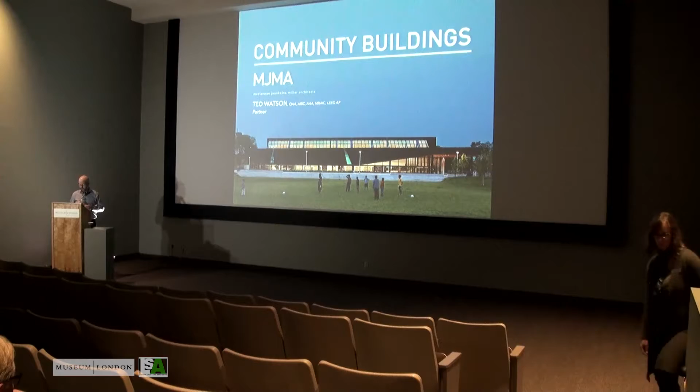So in thinking about how to approach that, I asked the question, why? Why do we do what we do? Why do our clients want to do what they're doing? And so in a way, what are the values at the heart of what we do? Our office really believes in community, and we know our clients do.

And that's what we're all really trying to achieve. Community is this greater thing that strengthens people and groups and reaches out and makes connections within the community and also to other communities. And I think we always try and retain sight, when we get caught up in the design and the architecture and all of the technical bits, that we're really creating armatures for people to use and to strengthen their relationships with others and benefit from it and create healthy, vibrant, socially and economically sustainable communities.

And now we believe that, okay, within that, good design can really transform communities. Now, of course, if a client has $30 million and they're going to make a recreation facility, that is going to improve the quality of that community, absolutely. As architects, and given our toolbox, what can we do to actually make that the best space that we can, and to exceed expectations on what those buildings, those facilities can do for the community?

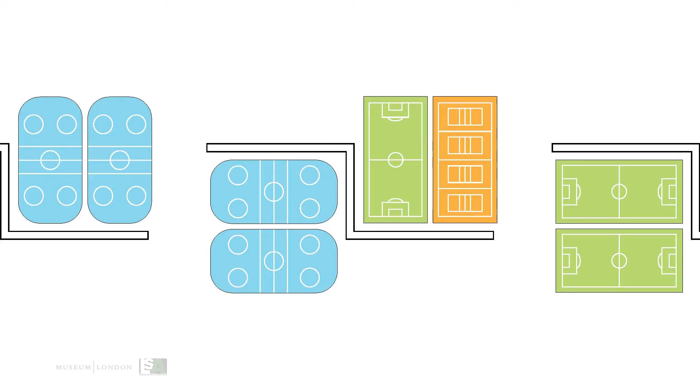The other notable element was the programmatic challenge—talking about Brampton, you need to talk about the demographics. In the last 20 years it's entirely changed: a much younger population, lots of new families, a lot of recent immigration into the community, a lot of South Asian population. What this building started out as was a quad-pad arena. By the time it got to an RFP, it became more of a multi-purpose recreation facility, but still had that Canadian ice in there.

By the time we finished the project, it was a 4-pad soccer center of excellence. So it actually evolved, but through the process there was an understanding that it could be infinitely flexible and adaptable through its life. That's, I think, one of the key issues in terms of the programming on this site.

In terms of the site plan, we needed to understand how we could take a huge, bulky building—a 4-pad arena—and break it down to make connections to a suburban site that has an urban feel and fosters civic space. This is our site, showing the building placement. It was very simple: if you look at a quad pad, there's only so many arrangements of those boxes, so we basically turned one as twin pads and shifted it to create these two spaces.

That created a corner site condition—an urban park on the corner that became a landmark urban space. Then on the inside of the site, we created a forecourt for arrival that fed into the other four outdoor playing fields.

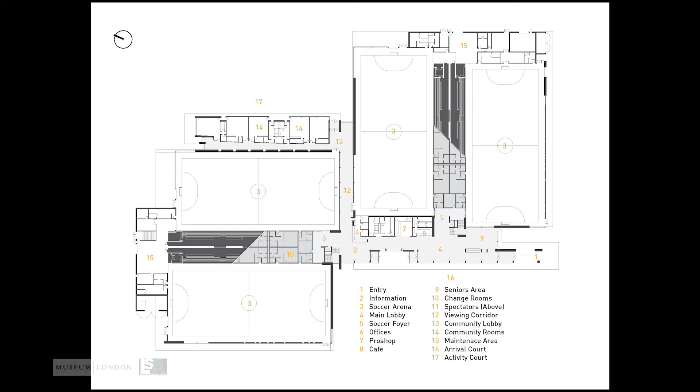Looking at the plan, here you see your typical twin pad arenas with change rooms and bleachers at the upper levels, and the service space at the back.

In this diagram of shifted and twisted boxes, we have the two soccer fields, but on each side we have an arrival court and a community court created by that shifting, along with a community space and a lobby space that relate to both of those.

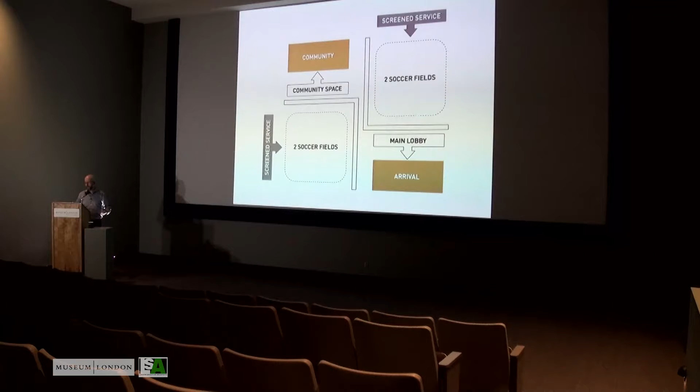On the perimeter of the site we have these screened service areas, so we're putting the service areas on the perimeter at the roadways. How do we deal with that was the question.

In terms of movement through the building, it actually concentrated access to the four pads very closely in the lobby space, but then allowed that transverse corridor to connect to the civic space on the corner of the site.

Looking at the design of the building, we kept the boxes very simple, but the community element and the lobby element became these lower roof structures with high volumes that represented entry, connected through light by the transverse corridor between the two outdoor spaces.

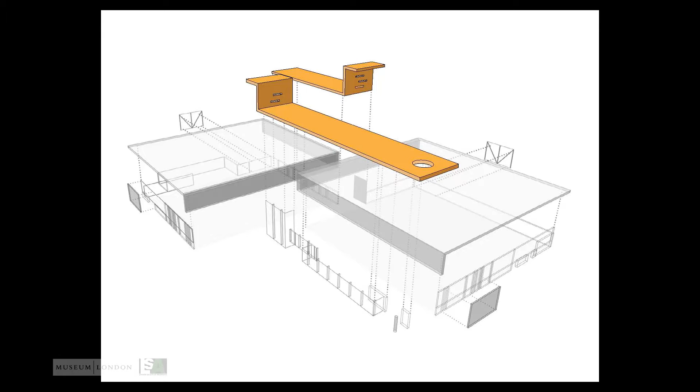Going back to this diagram, because of the plan it turned out there were six facades, and we treated them as pairs, so there were three pairs that were actually identical: the parking lot facades, the street facades, and the forecourt facades. We'll look at each of those.

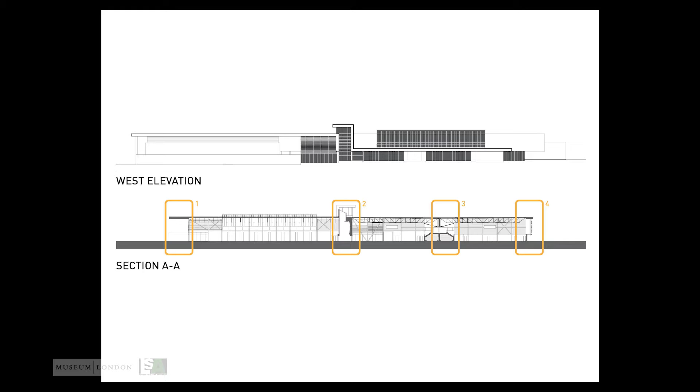These are the forecourt facades. And then through the plan of the site, how do we make all of this work on the budget we had? The entire project, including the site, was completed at $180 a square foot, so it was tight and we had to make it work.

So we treated the building really as a warehouse structure. It was all repetitive, the boxes were dead simple, and it was only the edges that we really elaborated. It's really this cross section - if we close up on it, we can see where those points are. We focused the design efforts on the places we felt would have the most impact on the exterior and through the center.

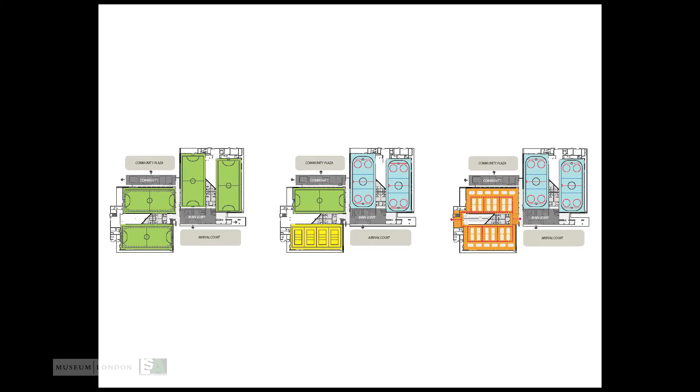In the end, the planning resulted in a facility that was flexible and could be infinitely convertible into different programs. In fact, they put in a basketball court, which wasn't even planned for, but the building's interior finishing was designed for indoor soccer, the mechanical functionality was designed for hockey, and the height was designed for volleyball. So it was very flexible and convertible in the future, depending on how the demographics would shift in the neighborhood.

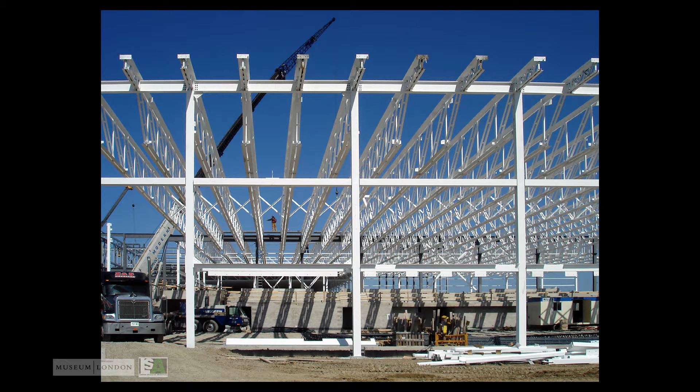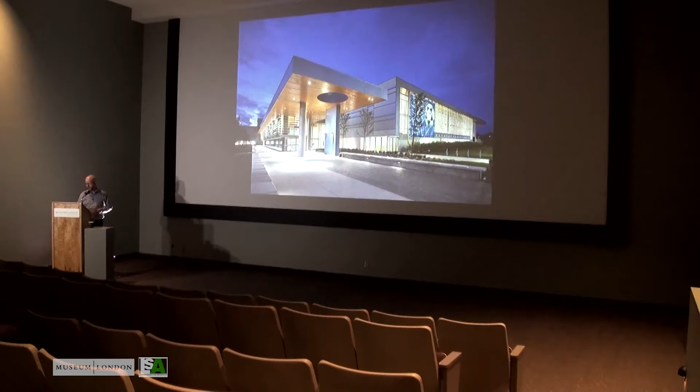Here you see, as you enter into the lobby space at the parking lot end, the use of wood that comes indoors, and you can see the clarity of circulation. There was a very studious application of AODA accessibility requirements to the floor, and the city was very interested in making that happen.

A lot of the floor patterns we developed were based off requirements for accessibility. You can see this at the stairs and elsewhere, along with the organization of the mechanical and servicing areas within the ceiling space and the woodwork.

Here's the transverse corridor. In terms of organizing with natural daylight, this is almost the heart of the building, because it brings that light down and connects the two main spaces of the site. There's all this transparency, sharing of different activities within the space, and you're actually walking through the center.

It's kind of like when you're in those aquariums that have the sharks on either side. You're going through all of these soccer games that are happening, so you can't help but feel part of the activities. That's the view down the community corridor, lower scale, but again using light to guide you through that space, and the judicious use of wood in those community areas.

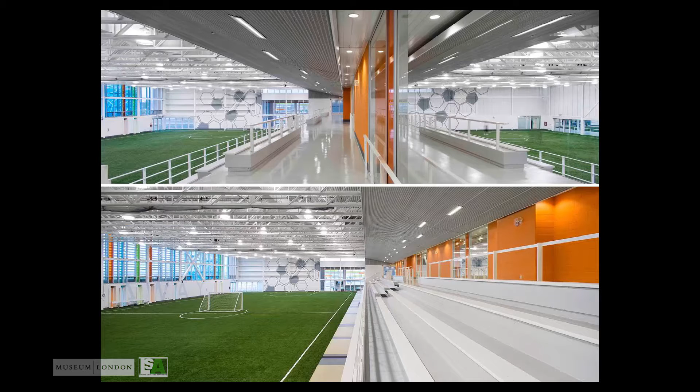This is a view from the upper level that shows the transparency between the two different facilities. And the use of graphics—this is what we call in the office liquid pigment, our finish here. It's just painted graphics on the pre-engineered wall surface. Even the decal for the glazing is a sort of exploded soccer ball decal.

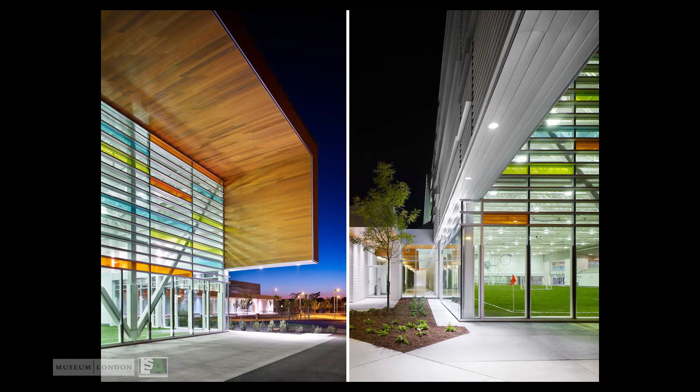Some views out to the community space. And here we're on the exterior. These are the facades to the street, and they're in two parts—one is a kind of hooded bay window to the street on the north and west.

You can see on the outside the views that allow for this transparency to come into the facility. So as you're driving by on Sandalwood or Dixie, you can see at night what's happening in the facility, and it animates the street and creates a vibrancy.

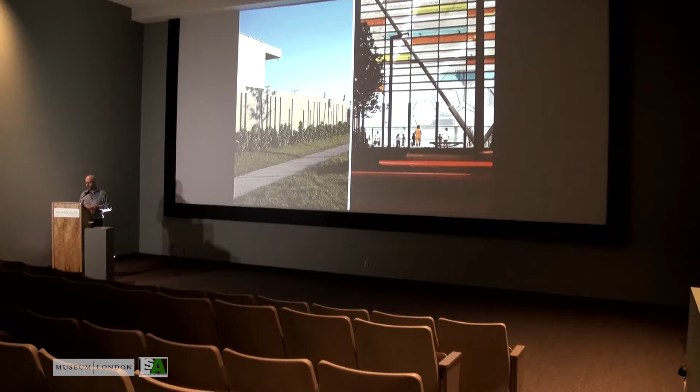Concrete garden walls were used, in this case with slots through them, to shield the service areas—the garbage, the transformer areas. That's what that looks like from the street, from the naturalized drainage channel across the way, with a view to the right of the civic court.

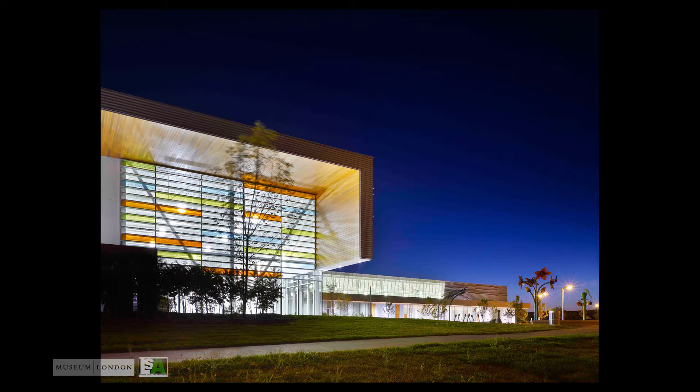The parking lot facades were actually the ones you see from a distance, and they were the ones you primarily arrived to the site by. So we wanted them to read almost as billboards of what was happening on the site at a large scale, because they're the first thing you see driving in, and also within the parking lot.

But we also needed, because they face north and west, to control the daylight within that space. So we used this louver system and incorporated a signage system to work with that. The city was also very interested in branding the facility with Brampton blue, so we incorporated some glazing panels that also protected the light going into that space. That's another view from the south parking lot.

So, Commonwealth Community Recreation Center and the Edmonton Eskimo Fieldhouse. This is a project we started in 2008, and it had to be operational in 2010 for the Grey Cup. So we had a good schedule, which was good—it's always a good motivator.

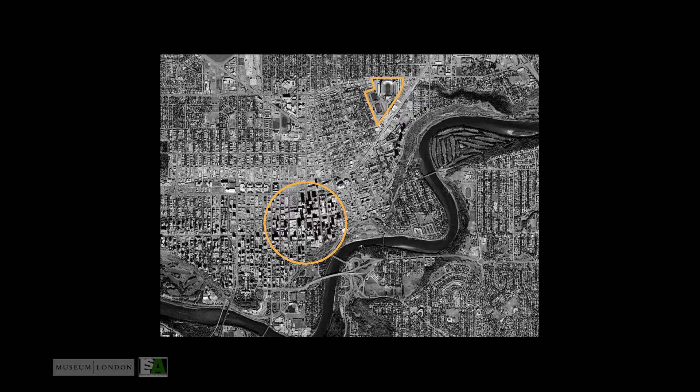The city, somewhat like Brampton, has a lot of revenue coming in, so they're providing a series of five recreation complexes. Unlike here, these complexes range between $100 and $150 million—that's Alberta dollars, so it's somewhat inflated, but the scale of these facilities is much larger than what we're familiar with here. Our project was the second one, and it was closest to the city.

You see the downtown, and it was one stop off the subway tracks—a great location, but a somewhat marginalized site that is home to the 1978 Commonwealth Outdoor Stadium, which is really a heroic and magnificent structure. But it had fallen into disrepair, much like event spaces that aren't in use throughout the year.

It had become abandoned, with vagrancy and drug use—so it was an unsafe place. The community site also has this pizza-slice shape to it, really the resolution of three grids coming together, which really drove the planning as well.

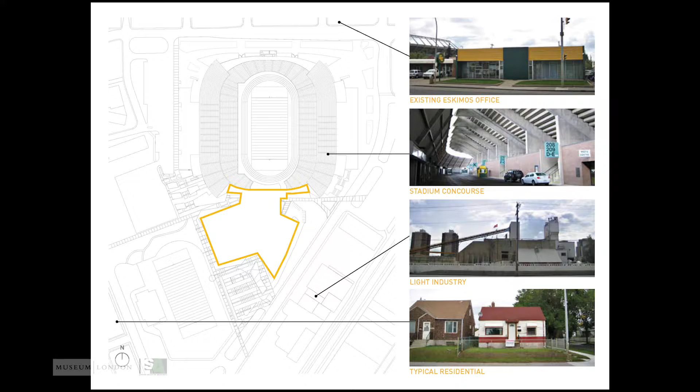In terms of the fabric around the building, we had the Eskimos office nearby. They wanted to be part of this structure. They had money for a field house, but they also wanted to be part of the stadium. We see the stadium concourse, which is this great precast stadium.

Then light industry happening along the LRT line, and these are typical residences, little wartime houses. So it was a distressed neighborhood, identified as such, and it needed a shot in the arm. So one of the site challenges for us is how do you repair this neighborhood?

How do you make these connections and animate this space and make strong connections into the facility? In terms of the programming, the challenge we had was 3 groups. There was stadium operations. During construction, U2 played there, and there was, I think, 100 semi-trucks that went in and out of that space.

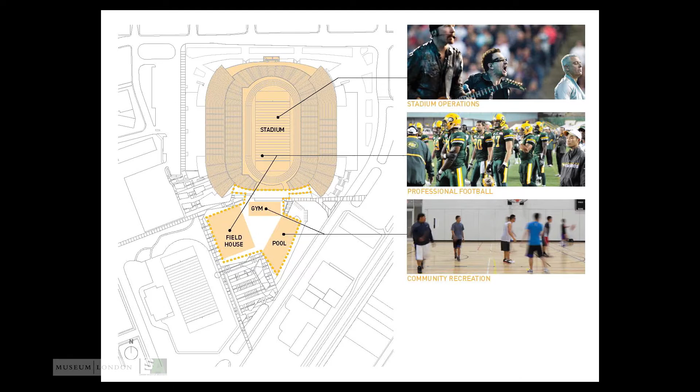So, you know, that's typical a few times a year. The Eskimos are playing there as well, large events, and they're going to be part of this facility. Then you have the community, who do swim lessons and kids soccer and fitness and whatnot. So how do you bring these 3 groups together? And more importantly, how do you make the whole greater than the sum of the parts, where there's synergies so that the programming overlaps, is flexible, and people are getting more than they actually bargained for.

So the project started with this existing rec center, which you can see the gym there, but then on the front side there was a series of racquetball courts all facing into the stadium with concrete walls. So clearly it wasn't the greatest use of that space. It was 3 levels.

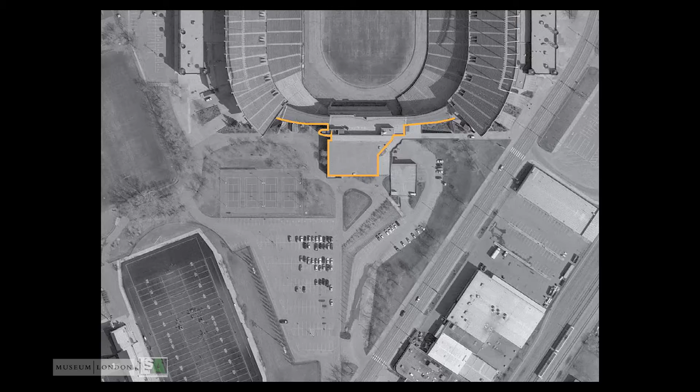We adapted. The other thing I should say is there was this marathon ramp, for the Commonwealth Games, the marathon came in and out, but really it's the service ramp, and it's critical to the functioning of the stadium. However, it created this trough that further isolated this site from the urban streetscape.

So in placing the large field house, pool, and other major program elements on the site, we did that so we could organize a space in the center. And the city, I think, was very forward thinking in that every site they developed had to have a social heart on the site, both indoors and outdoors. So that's their terminology, social heart, and I think it's a very good one.

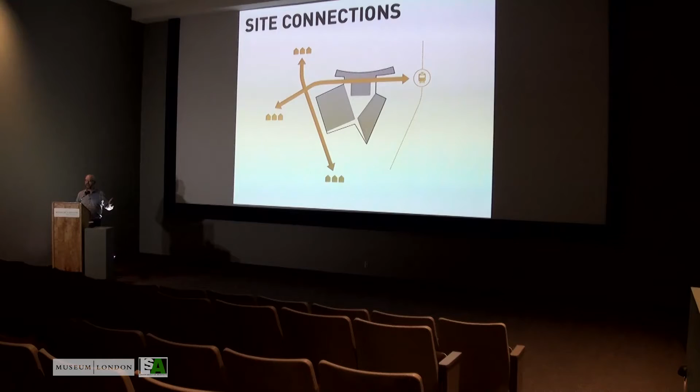So the response to the site was basically we followed the alignment to reconcile these grids, and then we brought the planning through the building to connect the neighborhoods and to connect to the LRT stop. And we created 3 separate entrances to feed into this social heart, so that the scale of this building wasn't creating more obstruction in terms of the use of the site.

We also created an event plaza out front that was at the scale of the site. So it's parking, but also an event space. Then we made the rest of the site basically a garden buffer, while appreciating that there's a lot of people on this site during game days and events.

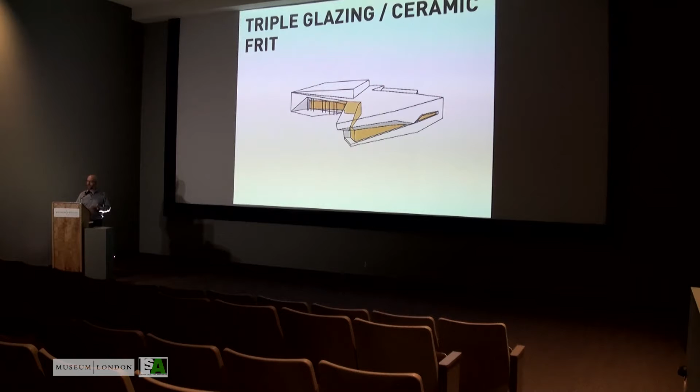In terms of sustainability, we had a daylighting concept of skylights and clerestory lights throughout the facility, with dimmable zone lighting control to adapt to the natural light coming in. Triple glazing in Edmonton made a lot of sense, particularly around the aquatic facility, with ceramic frit to modulate the sun and glare, and then a southern canopy at the front of the building.

We also had natural ventilation through the field house, so there was no air conditioning in that space, and it's naturally ventilated. Finally, a solar wall preheats the air that comes in, so even if it's minus 30, you're getting a 20-degree increase in the heat coming into the space.

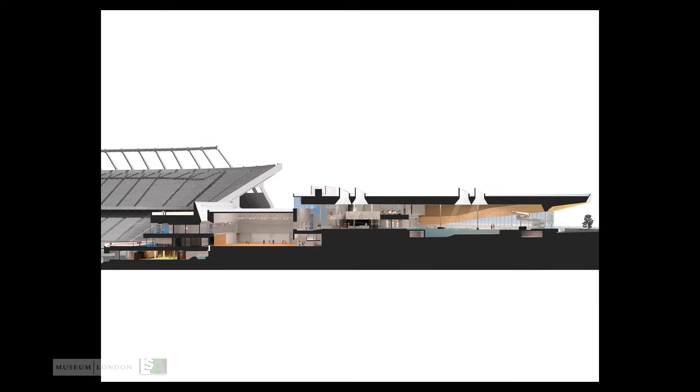Planning and programming: the section shows the stadium field is 2 to 3 stories below street level. We were working with the existing structure and gym, and needed to interconnect all of them, the Eskimos primarily here, through 4 levels. So we did a lot of both computer models and physical models to look at how to tie into the stadium, how to make this ramp work, and the forecourt space.

From an architectural perspective, the challenge was how to take very different size pieces and tie them together as a legible singular object that functions at the scale of this site. The stadium is a heroic and iconic piece of architecture, so we felt we needed to bring everything together to create a large and dynamic form to compose with it.

We looked at how to arrange that social heart space as a double height space with fitness and studios. Then from the stadium side, we looked at what the expression of the building should be on that side. I'm going to quickly go through each of the levels, starting at the stadium level.

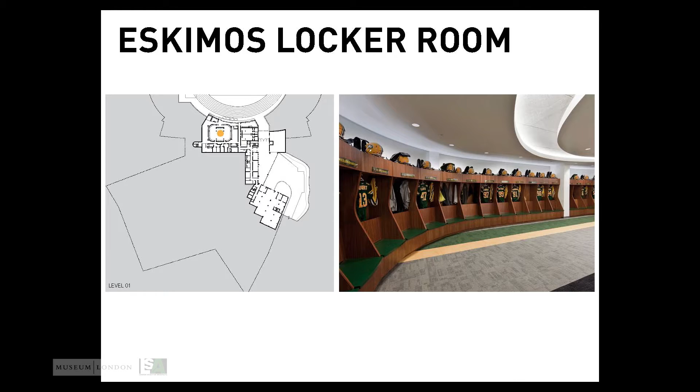The Eskimo locker room—we pushed out part of that space right to the track to create the locker room space. This is the service ramp and access space that we were able to make larger and more functional for them. The Eskimo box seating space sits on top of the locker room on the second level.

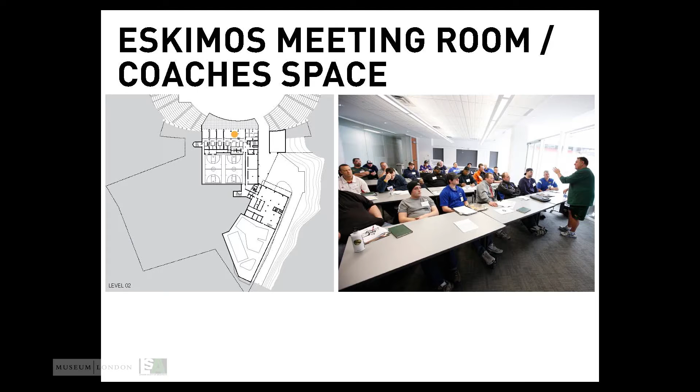On the inside is the coaching and team rooms where they would meet, but these rooms also functioned as community spaces, and for larger events they were the hosting spaces for concerts and such. So this level could really function as a multi-purpose space for all the users, as did the gym.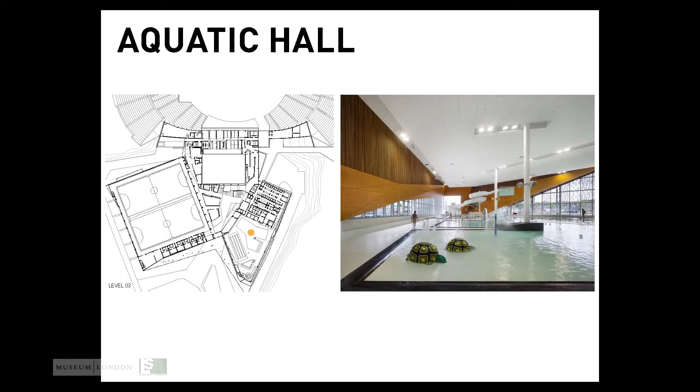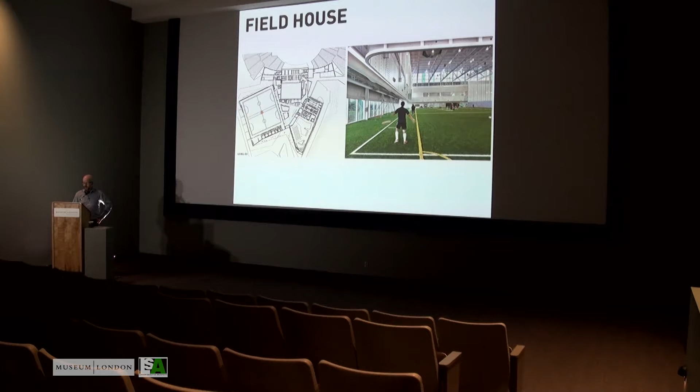The aquatic hall, where we start to see that wood coming into the space. And this is the change room, the universal change room with diffuse natural light at the back of level 3, the field house, the upper level running track at the 4th floor, and fitness and weight room as well.

So we had Eskimos working out in there along with everyone else, and it was very interesting—aerobic rooms as well. This is a view from the front of the building, and you can see the stadium to the right in the background.

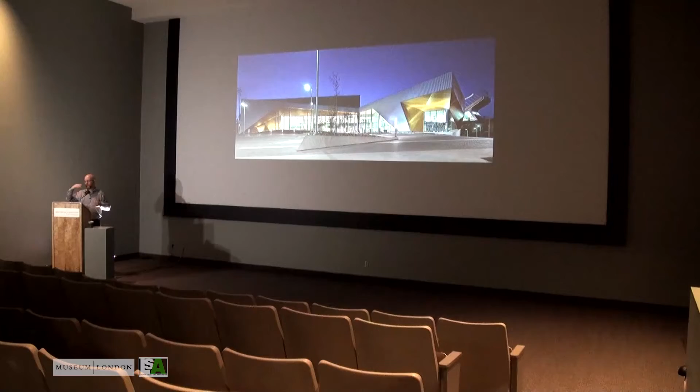The gold triangular shape is actually the top of the field house, which is a much larger form coming up, and it's represented as the solar wall with the Prodema wood cladding on the inside, creating this warm canopy.

It was important to create this canopy that was at the scale of this event space, which was also a parking lot for arrival.

You can see the fitness area at the upper level all looking out, and they have a great view of downtown from that level. To the right, the pool.

Then within the lobby space, we see centralized natural light. We started with 23 skylights and we ended up with 4. A lot of them got value engineered out, but in the end I think it was a good exercise because it focused the light where we wanted it.

Through the skylights, to the back, to the stadium. This is the information desk—clients always ask us for a big sign for the information, so we thought it would be fun to actually put it in the ceiling like this. It's the biggest information sign we know of.

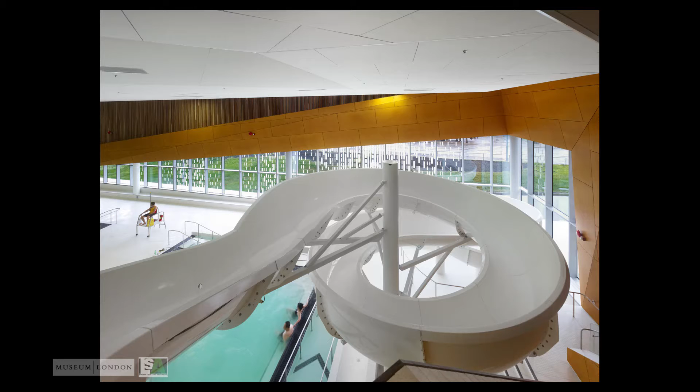There you can see the use of ceramic frit on both sides of the pool and elsewhere, partially for solar gain, but also for privacy, to create something of a veil between the people arriving at the entrance of the building. Then the stair is within the skin, so it's actually controlling the space up and down.

You can see the use of the fitness area, and down to the gym and out to the field house or the stadium beyond. That's that stair.

We used a material called Fundermax that was milled, and we actually came to that because it was cheaper than any other solution we could come up with. We started with a glass and perforated metal solution and ended up with this.

Aerobic studio and views into the field house with precast casual seating for spectators. Here you can see in the field house the natural ventilation fans at the top, and on the other side are triple hung windows.

The entire west side of the building opens up to the outdoor practice field and also to the community promenade that connects the community. So on events and game days, those doors are open and people can flow inside and out.

This was Grey Cup. You can see the plywood on one side. We'd only built the field house, but they had the big party for the Grey Cup, so you can see a lot of Saskatchewan jerseys down there.

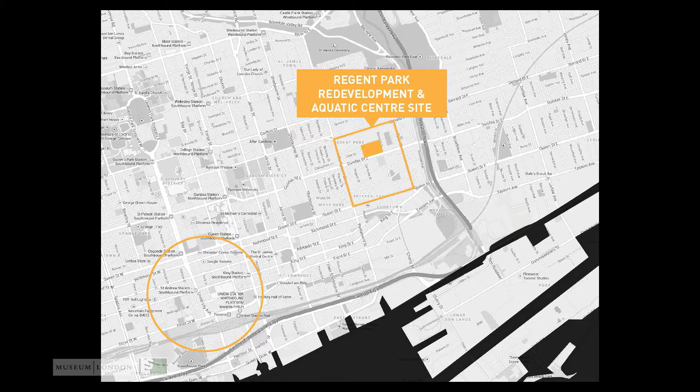That's the downtown core of Toronto, and that's the Regent Park development over the three phases. Our site is the little rectangle here.

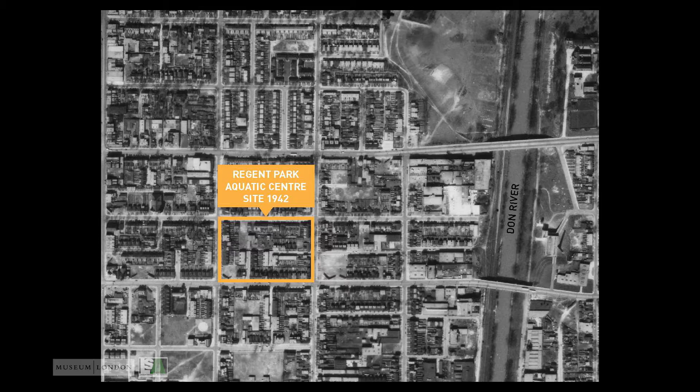This is an aerial view of Regent Park, 1942. There's a long history to Regent Park, but it was Victorian, then it became a slum, so it was very small scale. In fact, if you're in Cabbagetown, it was a lot like that. But it had become a real slum, and there was a determination to fix it.

By 1957, using the Garden City model, a social housing scheme came into effect, and that's our current site today. In fact, the scheme advanced further and took up the entire area, and what resulted was a disconnection of the actual street grid.

They took out some of the streets so that there were walking streets and garden spaces, but I think we're all familiar with what that's resulted in. So connection was really important in terms of the revitalization. Down below, there were some very nice Peter Dickinson apartments built in the 60s as well, but they're also under the wrecking ball.

You see to the right, kids protesting to try and get the outdoor swimming pool. It says, 'Where's our pool money?' So there was an outdoor pool that was built, and it was well loved in the community. In fact, when we were designing the new aquatic center, after a lot of consultation, what we heard a lot was that people wanted it to feel like an outdoor pool—they wanted to still have that quality.

This is Regent Park today. Over the last 20 years, it's moved from European immigrants to more recent immigrants, and it's really become a transitional neighborhood. There's a lot of distress—50% of residents are under the poverty line, so there's a lot of crime, which has led to this revitalization. That, and the fact that it's a great location for new housing, means it's going to be a combination of mixed use and affordable housing.

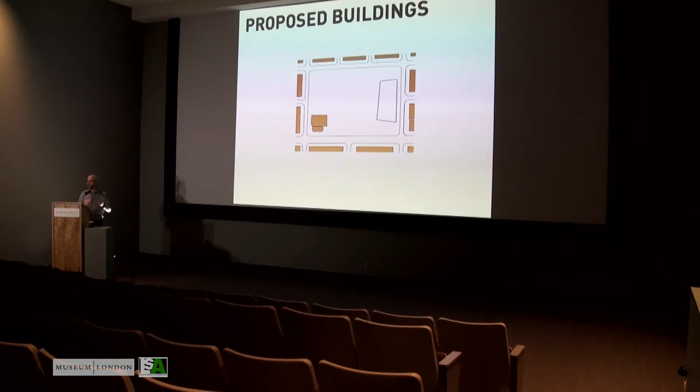And in terms of the programming question, with all these new immigrants in the neighborhood, a diverse mix of race and culture, how do you create a swimming pool which is culturally difficult? Questions of nudity, exposed skin, mixing of gender is a big issue, along with notions of crime within this area.

How do we address those, but also how do we make it exceed expectations as a facility? So looking at the site, the figure ground shows the proposed buildings and existing buildings. It was a 6-acre site, and we were given the west side of the site. Connections through the site were important.

Through the planning of the park, which we did preliminary work on, we came up with the idea that there's a number of amenities, playgrounds and markets around the park, and the center would have a central active space, which would really be the heart and open space of the park. We felt it was important that the aquatic center really address that central park space.

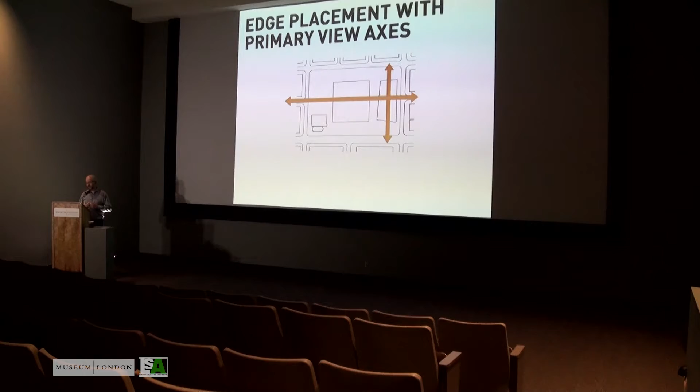Rather than the city pushing us towards a corner building that registered the corner, we felt it was more important that this was a pavilion building that registered the street, the urban street edge. So we took the approach that we wanted the most transparent and open aquatic area that really opened to the park and felt like an extension of it, like an outdoor pool.

So we placed all of the dark programming on the street side, on the Sackville side, and in the interest of creating a dynamic street presence, we created the most transparent and nice dry corridor that we could come up with, and then we perforated this bar as much as we could to allow for those

penetrating views and interconnections. So this is the first facility in Canada that went fully to a universal change facility. There's no male or female washrooms or change rooms in the facility at all. What it is, is a central bank of toilets and showers with cubicles for changing and lockers.

And it's actually very virtual—it's glass on all sides. And in the end, this is the kind of circulation, movement, and sight lines that you get through the building.

So looking at the massing, the earlier model shows this bar being expressed, but by the end it became more of a singular gesture that kind of tied together and almost became a subtractive volume that was carved versus additive and built up.

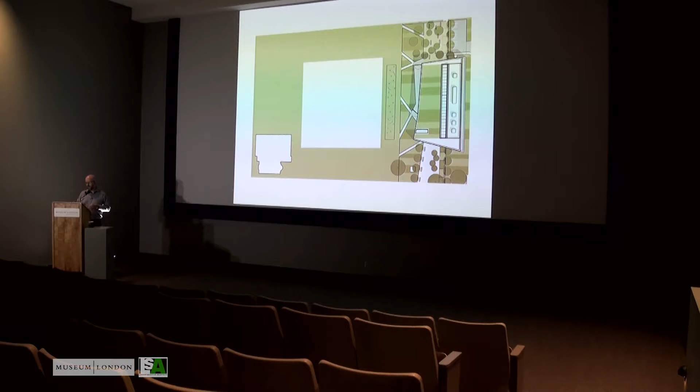Just a diagram that shows all of the different elements throughout the building, and the central skylight. Well, this site plan shows how the roofscape actually became the fifth elevation of the building, and the green roof on top really needed to address what people were seeing from these high rises and also tie into the landscape design at the base.

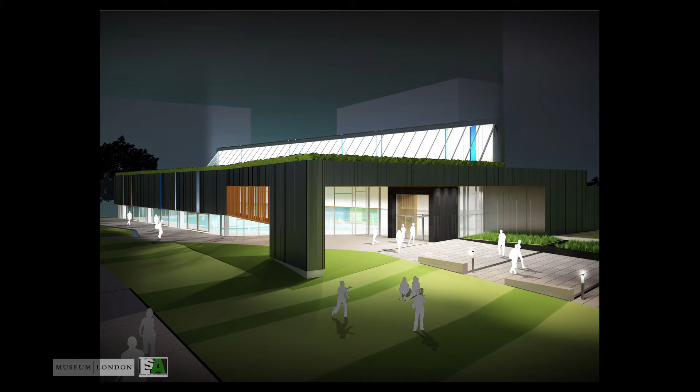And this is an early model that shows the green roof and how we attempted to make that happen. And a longitudinal section which shows how the west face actually lowers down to block out the harsh western light coming in.

And a cross section through the building that shows this lower section on the west, and then a lot of glass and transparency to the north, very good light, and then we're dropping light in from the top. We call this the dorsal fin of the building that really ran the length of the building and allowed for that connection to come through.

And then the change room is a lower space that allows for the mechanical systems to be screened up above it, and then there's that dry corridor along the eastern face of the building.

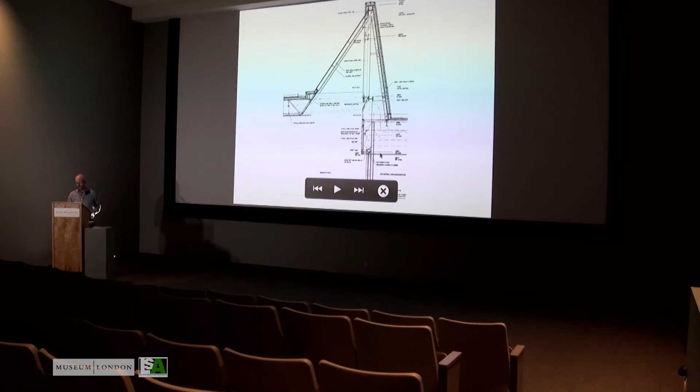And here's a section that shows that dorsal fin skylight that runs the length of the building and how we paired the mechanical with the structure to bring the mechanical system through that space.

And here's a view from the high rise across the street and from the roof that shows the green roof actually interconnects. We haven't got the final photography on this yet, but it connects with the blue lines of light in the glazing so that it really does become a studied elevation from above.

And this is the view from the south that shows the access into the building—very transparent, very welcoming, very warm. The use of wood really glows, as is often the case in many of our projects when we can afford to incorporate it.

Inside, it's a very tight lobby space, but because it's part of that higher vaulted skylight, it doesn't feel too constricted. There's slatted wood that's acoustic on the inside of the aquatic facility.

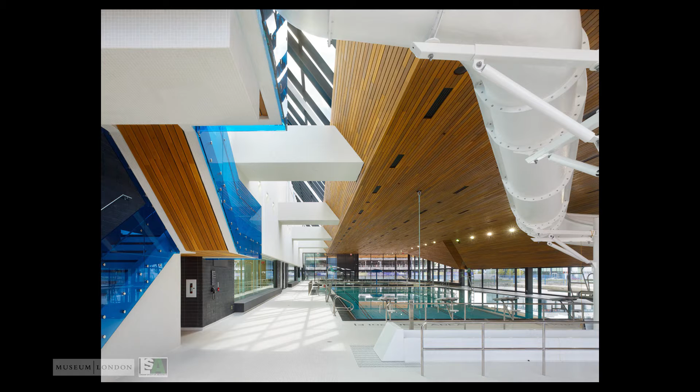We see here the slide, the Tarzan rope, and the slide diving board. There's a lot of fun activities for youth, which is really important in aquatic facilities—not just kids, not just seniors. You've got to try and animate those spaces for the middle ages too.

Here we see a view down the length out to Dundas Street, with the streetcar going by very often. Then there's the quality of light at midday—it changes as it moves through that skylight, which faces directly south. You can see through the change rooms from pool to street, from park to street. This building is perforated.

Moving outdoors, there's a sunbathing terrace with three bays of sliding glass that open up to the exterior.

Moving around the building to the east side—when we went to the design review committee, they were very concerned that this elevation was too monolithic. So we focused on making it bold and monolithic, but as finely detailed as we could.

In this change room, to the left you can see into the universal change rooms, and you can see a column here. There's light concealed below the precast bench that runs into our outdoor area, and light concealed above the glass container of the universal change room. There's no structure or mullions on that side of the corridor.

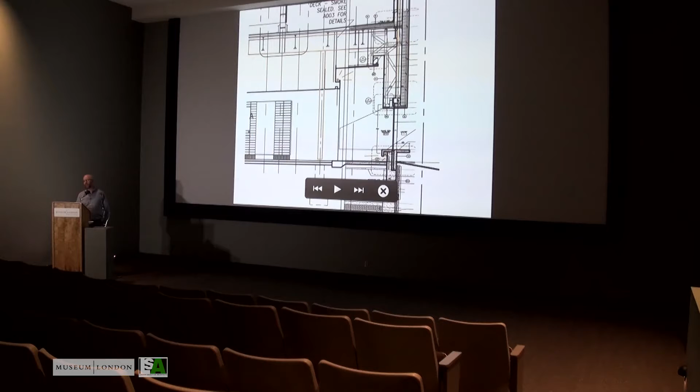So we can see the column here—the structure is suspending and supporting the glass from above as well as the parapet. There's a bit of gymnastics involved, but we felt it was important to achieve so that this glass could be butt-jointed without upgrading to a heavier gauge of glass.

This is a view through the universal change room—you can see to the park, and you can see to the street.

Looking back from the aquatic side, these strips of frosted glass are actually where the blinds come together so we can achieve a lockdown of those change rooms so they can be fully usable by different genders. In fact, the entire pool has blinds that come down so the pool space is completely private, addressing different cultural and gender issues—Muslim swims, women's swims.

It's also very close to the LGBT community, so these universal change rooms have been extremely well received, for reasons of privacy and safety.

We presented at a Parks and Rec event once, and someone said afterwards that we'd created a candy store for pedophiles. But in fact it's to the contrary, and we were really fortunate—the client was there, the director of aquatics at City of Toronto, and this has actually become their standard.

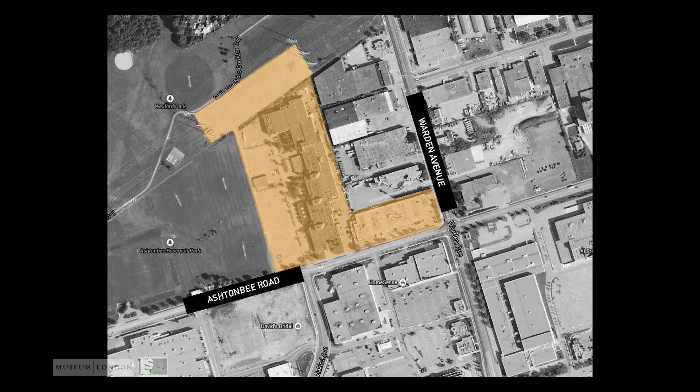Looking at the site, it's just off Eglinton Avenue at Warden, and there are 2 buildings on the site, the Ashtonbee building and the automotive building, formerly a VW factory. The campus started up around the late 50s, and the new building we were proposing for the site, we put at the front of the campus.

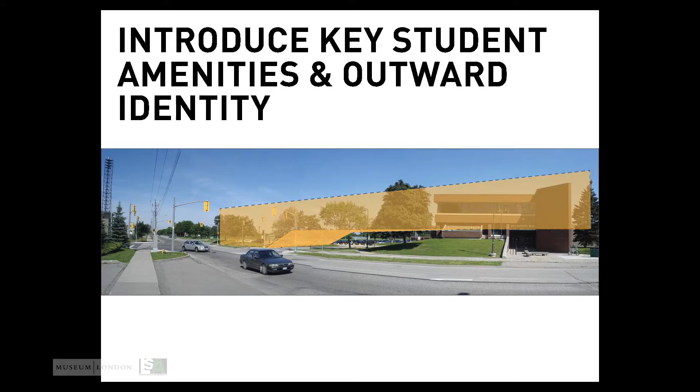Although we were to introduce key student amenities, it also had to have this outward representation or identity to the street, to the community.

There were 19 stakeholder groups and user groups involved that we consulted with to develop the programming, which was new build and renovation. There was a social hub at the ground floor, student center at the ground, student services.

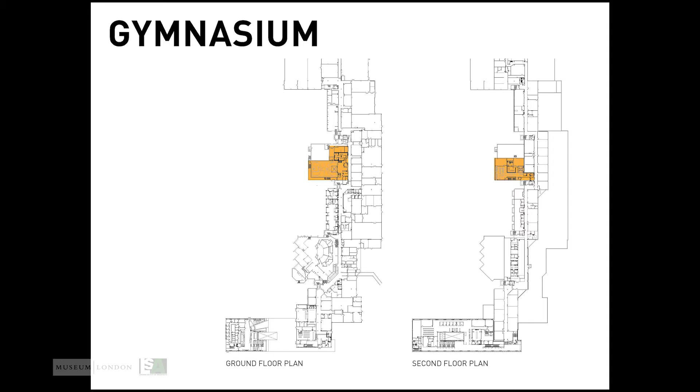A second floor plan consisted of the new library space, and then a new gymnasium and a refurbished gymnasium with a top-up of fitness on top, and then a series of interior renovations, all within an asbestos-ridden old building.

So we started then with a master plan. There was some master planning developed by others, and we really took that further. There was a tunnel that connected the two existing buildings that was very unsatisfactory.

One of the issues the college had is: how do we plan for the future? How can we make these connections to the future?

They also had a SmartCentres go in front of the building, and a new intersection was placed on the site. How do we align with that new access point on the site? So we introduced a pedestrian walkway and a new drop-off and access point that was aligned with the intersection.

We also placed the building at the front and, in effect, created a bridge system and put the fitness center at the center of the site.

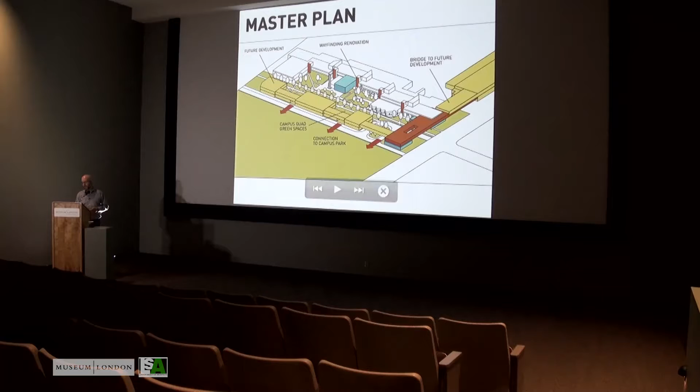Then we planned for what could happen in the future. There are plans to develop this space, and potentially this interior parking space could become developed as well, creating a series of courtyards within that space.

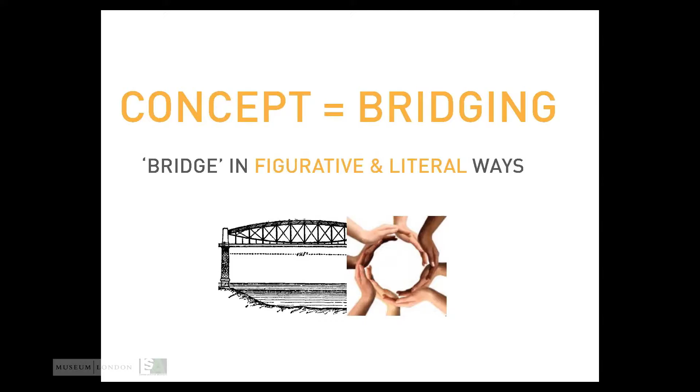So the concept we used was one of bridging, both figurative and literal bridging on the site. We took the college's book of commitments, their strategic plans and goals, and tried to interpret those into urban, architectural, and programming moves in the design of this project.

The first was a very literal idea about just bridging over between the buildings and making these connections, importantly allowing future connections to their existing facilities.

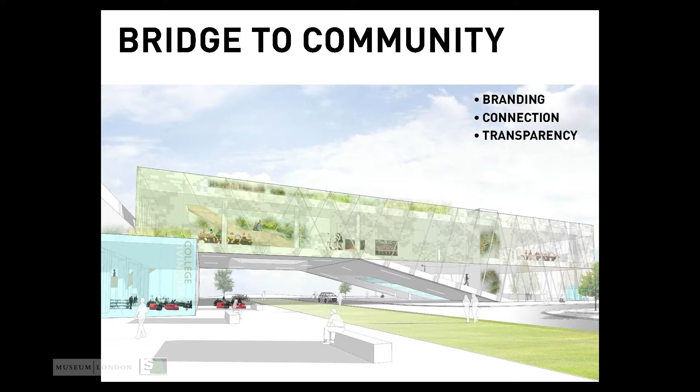The second was: how do we bridge to the community, create this branding, this connection, transparency, this welcoming gesture that brought people in and let them know what was happening?

How do you create spaces that can bridge between students within the college, designing for diversity and accessibility? How can you connect staff and faculty inside and out? And then, new models of pedagogy.

Particularly in the library, Centennial College had developed a couple of very nice libraries recently, and we were able to take a lot of the concepts developed there and take them further with the librarian group, developing spaces that adapted to the ways of learning they were interested in.

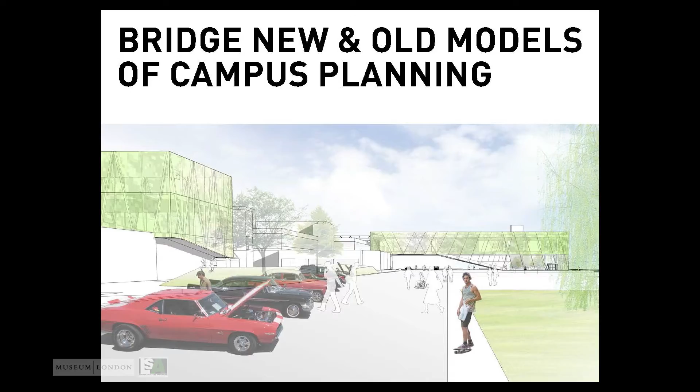And then, how do you bridge new and old models of campus planning? This is the annual show and shine that they have every year.

There's a lot of hot rods in sight, and they pop the hood. This is in Toronto, but it's sort of an Oxbridge example of campus planning. So how do you bring those two things together in the site? How do we represent the culture of the automotive, of transportation?

We started thinking about how you arrive on the site, and how you see that arrival from within the building, and how the site then becomes an armature for displaying what's being done within the school. This is the before shot, and clearly they were disturbed by the lack of presence their school had, and the fact that nobody knew they existed. So we proposed bringing this building out to the front and making it very transparent and open.

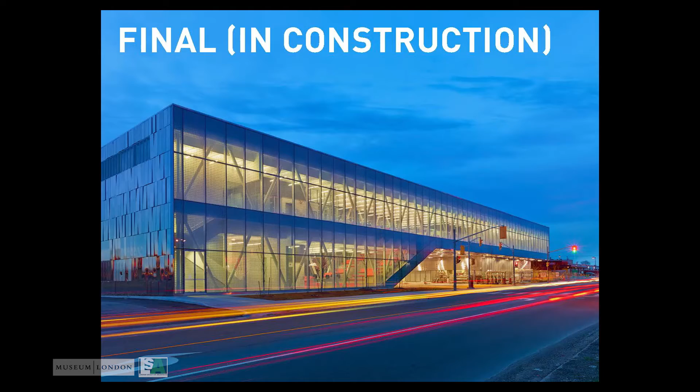And in the end, these are photographs under construction, but this is what it looks like. At night, you can see it's very integrated with the front of the building.

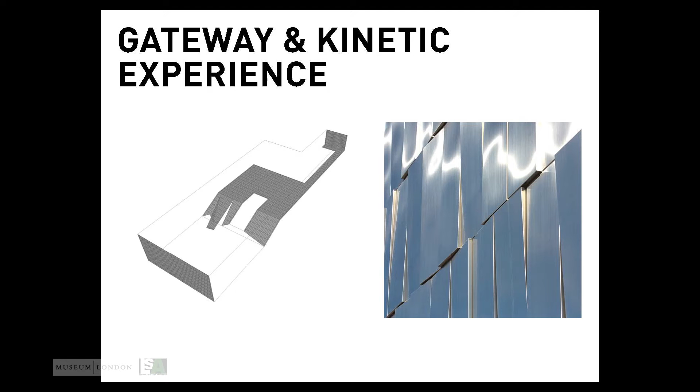In terms of the cladding system, the envelope, we started thinking about this as a gateway, and that it was a kinetic experience. This is Cloud Gate in Chicago, the Holland Tunnel, and the kind of fetish quality of engines, of chrome engines. So we went with a stainless steel cladding system that allowed us to have 2 inches of movement on either side of a rectangle.

The glazing was triple glazing to meet the energy modeling requirements. We used a ceramic frit that actually modeled the truss system of the building. There are 4 trusses that run the length of the building, and the frit captures that. But it also allowed for a branding moment with Centennial College.

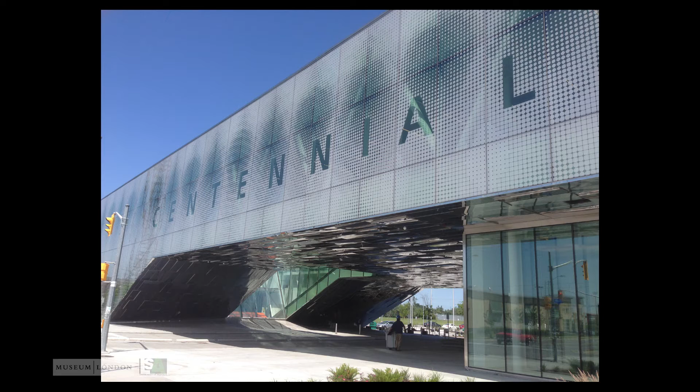Here you see there's a central atrium space that's actually a courtyard that's suspended, so it's open to above and open to below. Again, using natural daylight to organize the building. There you see it from below, and above you see the negative of the Centennial text that's 50 meters in length, which the college was very happy with.

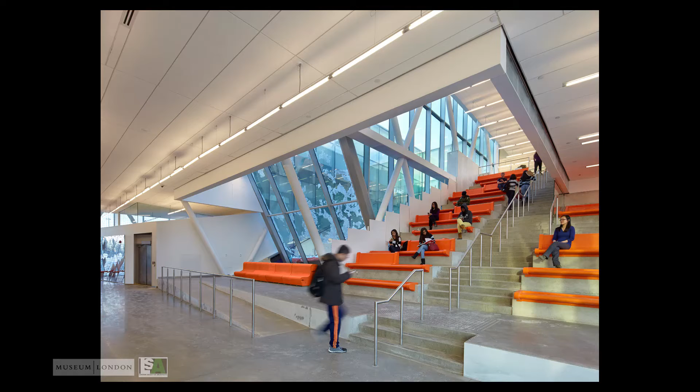That looks like this, still under construction, but you get the sense of it. So that's where you wait to sign up for your courses, but it also is an informal lecture theater, study space, etc. So it's flexible, it's open, and it's public realm space within the building.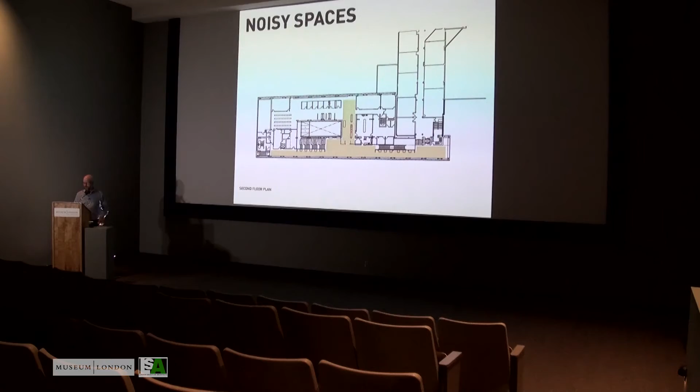It's a very popular space for student use, with views out to the back of the Smart Center, which is mostly concealed. The views were not great, so the ceramic frit actually creates more of an interior environment. There were noisy spaces along that south face that lead into the library, and it was really designed to filter into and further into the quiet spaces.

Here you see the open carrels and the group study rooms, some casual seating as you enter, and then the group study rooms and interior views of those spaces, with casual seating throughout.

This is my last one, so I'm moving a little ahead of time, but University of British Columbia.

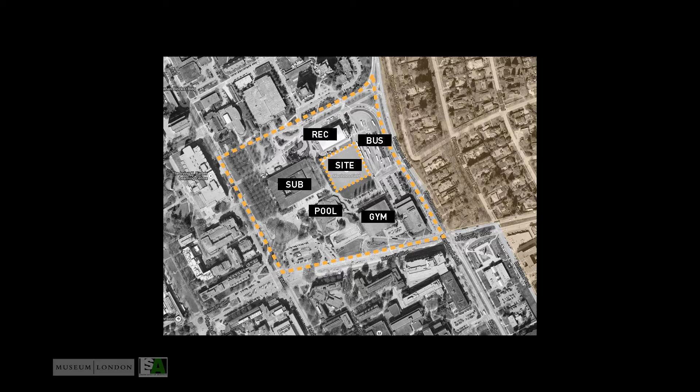The UBC is really a city among itself. There's a huge forest that separates it from Vancouver, and they've been busy selling off a lot of that forest and generating new housing within the university plan, but they've had an incredible expansion over the last decade. And this is a site that we're working on, a new aquatic center, and this is exactly the site. When I left there 25 years ago, this is what's happening.

Our site is a field right in the center of it, and there's an existing pool, an outdoor pool here. And there's a gym, recreation facility, sub, and a bus terminal.

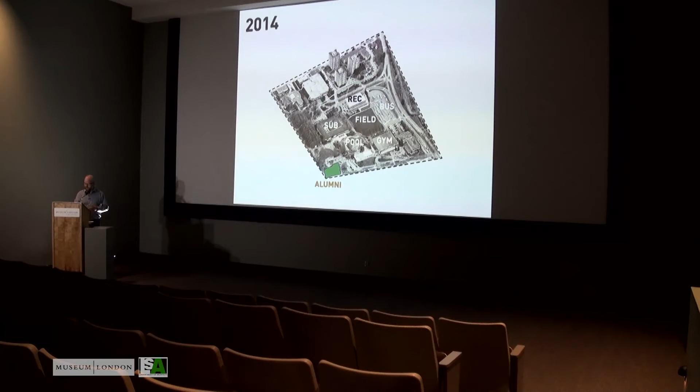But in the next 6 years, there's going to be an alumni building by KPMB, a new student union building by Dialogue, a pool coming online 2016 by ourselves, and a new bus plaza terminal. The pool's taken down, that becomes the new field. Below it is an underground bus terminal. And then housing, market housing and student housing, fill in the rest of the site.

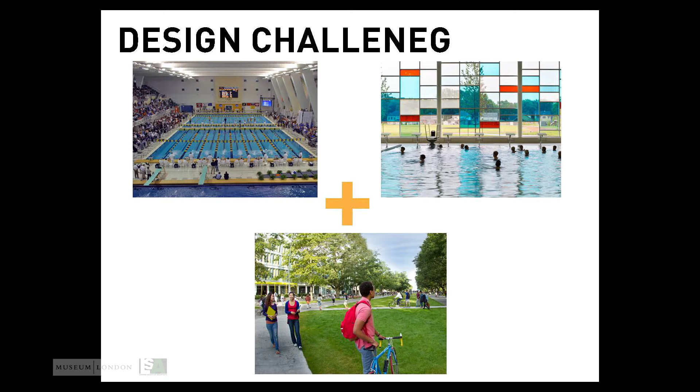So we were working with different consultants to generate this secondary plan for this district, which is really the student heart.

The design challenge was really this: 7 athletes went to London 2012 from UBC, more aquatic athletes than anywhere in Canada. Meanwhile, they have the largest growing youth population and new family population in the Lower Mainland.

And then, of course, how do you integrate the campus life, the student experience, into this new building? So how do you bring those 3 things together? And then how do you work with this kind of ever-changing site to create legible public spaces?

The thinking was we studied the movement of students through the campus, and we recognized that this new bus terminal, 50% of the student population is going to arrive and leave from this space. So the southern facade of our building became a very important arrival feature, and views into the pool were very important to the campus architect.

But for us, also protecting the privacy of the swimmers was important, so we had to find a balance. The cars coming to the north for drop-off for children's facilities. And then along the spine, there's this athlete's way that connects the 5 different athletic centers. So we wanted to support that as a public realm endeavor.

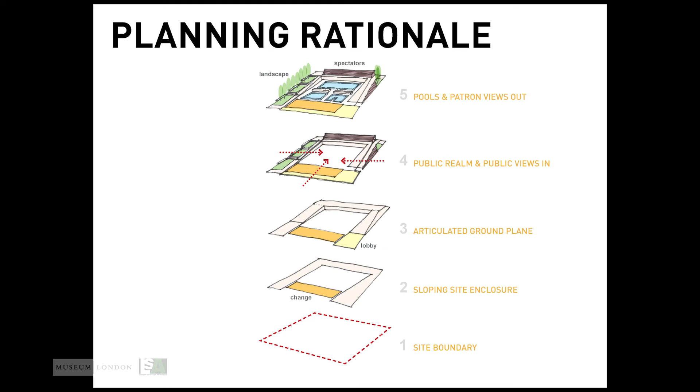And then the planning rationale moves from below, from the site boundary. As it moves up, we wanted to create public space on 3 sides. And we didn't have the program to make that indoor space, so we created indoor-outdoor space that actually was somewhat ambiguous.

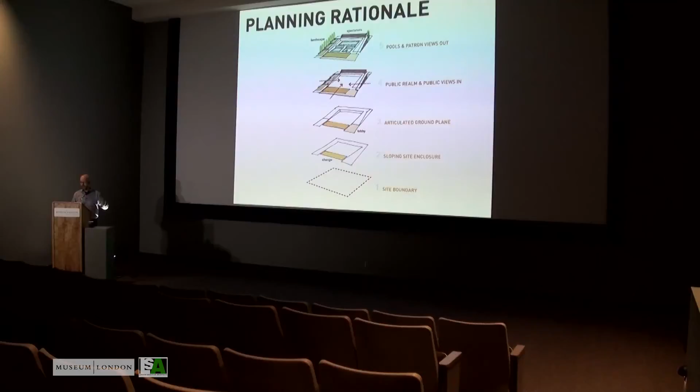As you move up a ramp, you can get access to the spectator bleachers, and the space at the back can actually be closed off, so you can have tents for swim meets, you can have spinning classes outdoors, and you can move in and out of the facility at the spectator level because you're not within the control of the aquatic center. So it addresses 1,000-person competition on the spectator side because they're not using the lobby.

The lobby then can be used for children's programming, for kids, for other community-based operations, and the campus can walk around the building and experience within the building, sit in the bleachers, have their lunch, and experience that building from the public realm.

There were some great Thompson Berwick Pratt buildings that are on site, War Memorial Gym, the existing student union building, which were very powerful, classical but modern, and that was kind of our cue for the expression of the building.

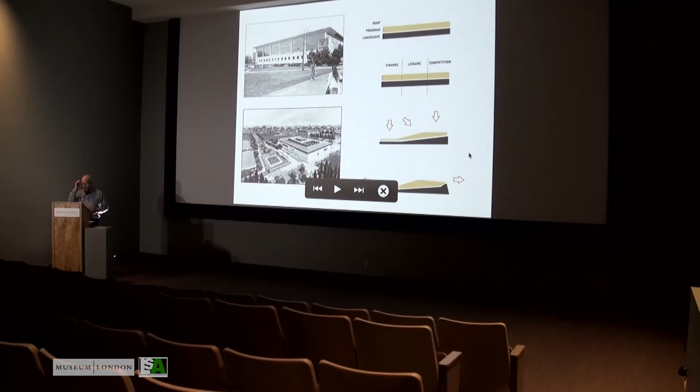Again, grouping it into simple layers of program and elements, and then pushing and pulling to really modulate the light and to deliver using the slope of the site as well.

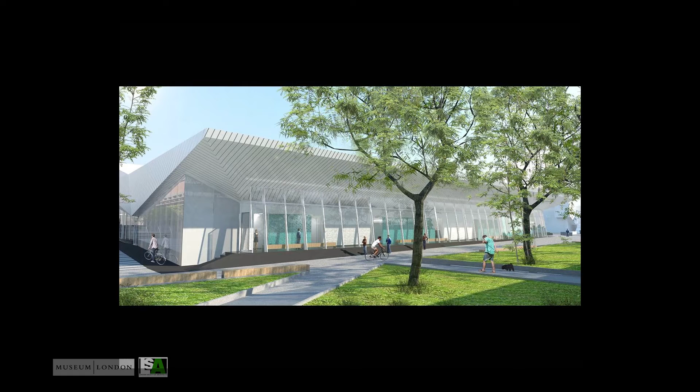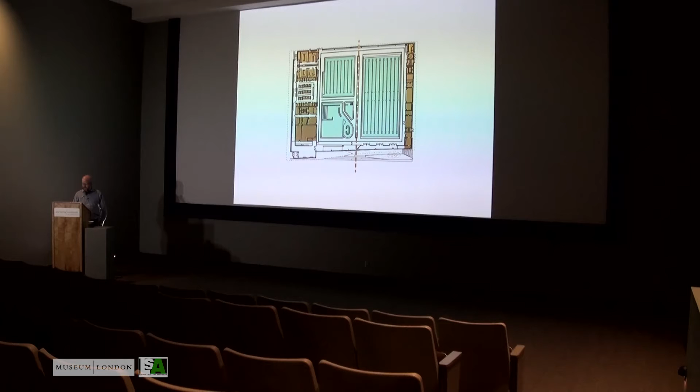And there are these views where you can watch people swim and competitions happen. The planning of the actual building is very simple, like Regent Park, a couple of bars, and then down the middle is a skylight that really drops light into the heart of this building where it needs it the most.

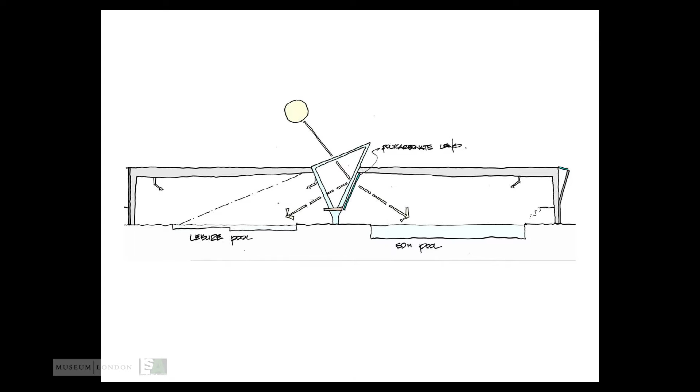This was an early study and a rendering to look at how we could do that. And this is from the competition side, where we see this Barrisol screen that filters the light and protects the competition side from direct light and glare, and can also be used as a projection screen.

This kind of looks like the Hunger Games, where those people come up in the sky.

And then this is on the community side. We see the Tarzan swing and whatnot, and you can play Jaws there at night. This is a view out - you can see the bus there in the bus loop, and a view from the diving board showing the light coming down in that skylight area.

So it's almost like a tent, and it's all acoustic Hunter Douglas textile, a high-absorbing acoustic material, so that they can have a competition and kids' swim lessons in that space. So although the screen does not create a true physical separation, it's a virtual separation that signifies two separate spaces within one. And that's the leisure side looking into the lobby.

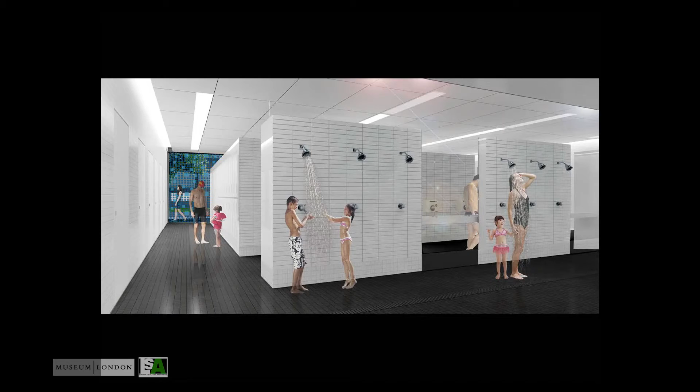Moving through the universal change, we've actually put the showers on the deck. People are always looking for more deck space, and they're always looking for people to shower more, because it actually saves on the chemicals and all of those things. So by putting the showers on the deck, people can easily take showers and still be in the change room, giving more deck space - it was a win-win, and it suited our incredibly low budget that allowed us no real space to design with.

That's the dry corridor and the lobby space as well. And then finally, the sustainability - this is a LEED Gold building, and UBC is ahead of the rest of Canada by 10 years. They're very much into regenerative neighborhoods, a lot of different things. And we talked about the daylight and their zone lighting control, but also with the water.

The cistern that we designed handles a 1-in-200-year storm. It does gray water flushing, tops up the pool, which loses 2 inches of water every day through the filtration system, and stores the water when we shut down for maintenance. And there's one more thing - it irrigates the landscape around. So it's unlike any other we could find in North America that does anything like this.

And then in terms of the ventilation, we're delivering air at low level, and we're actually collecting the air within the gutter system. So we're scouring the surface of the water and collecting the chloramines, and that's where they live, right where the swimmers are breathing. So we're in effect creating a healthy but also high-performance air environment within that space.

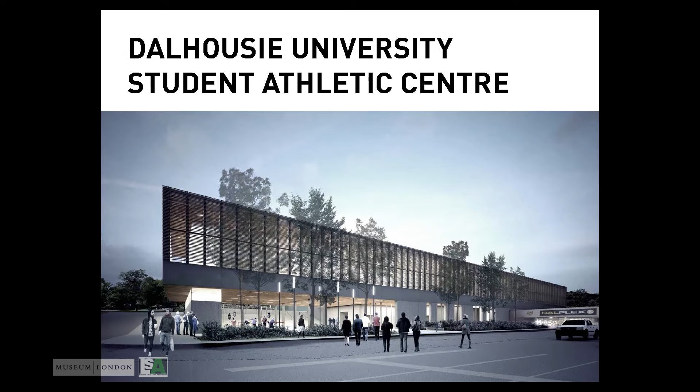And then finally, just four projects. Dalhousie University Athletic Center - these are projects on the go. This is an athletic facility near the Dalplex, if you're familiar with the campus. Branksome Hall Athletics and Wellness Center is opening in January. The Goldring Center for High Performance Sport at U of T, a project with Patkau Architects, is opening this fall. And a hockey facility we're developing in Calgary, Great Plains Recreation Center.

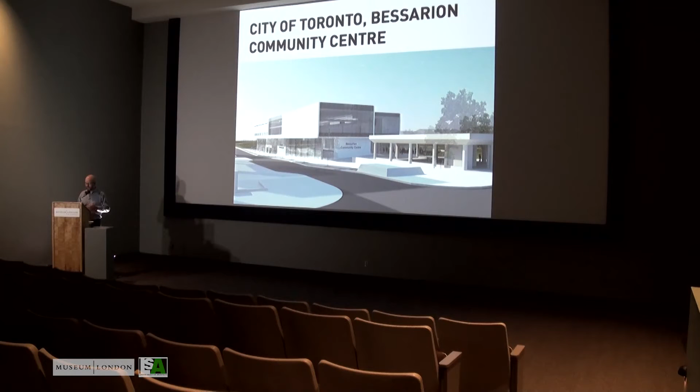And finally, City of Toronto Bessarion Community Center, which has library, fitness, aquatics, and recreation in a 100,000 square foot facility next to the subway on Leslie and Sheppard. So that's in design right now.